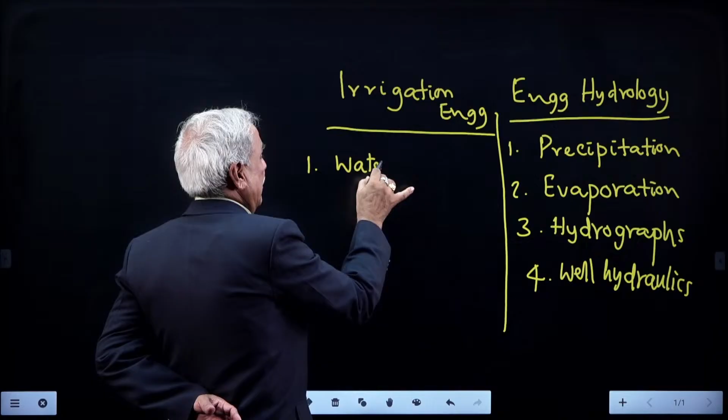First chapter is water requirement of crops. Second chapter is design of unlined canals. Third chapter is diversion headworks, which in the loose sense we call weirs and barrages, and gravity dams.

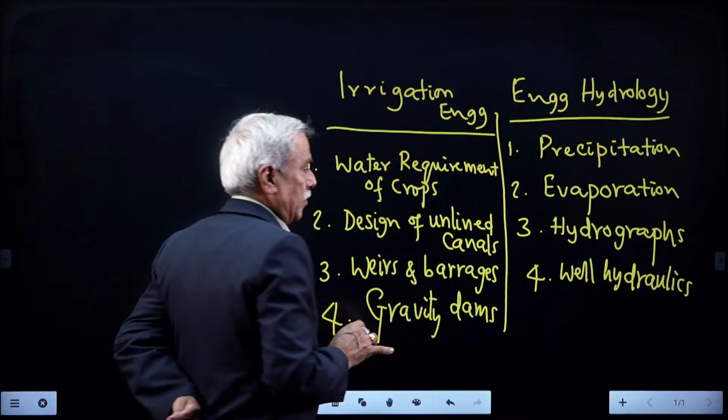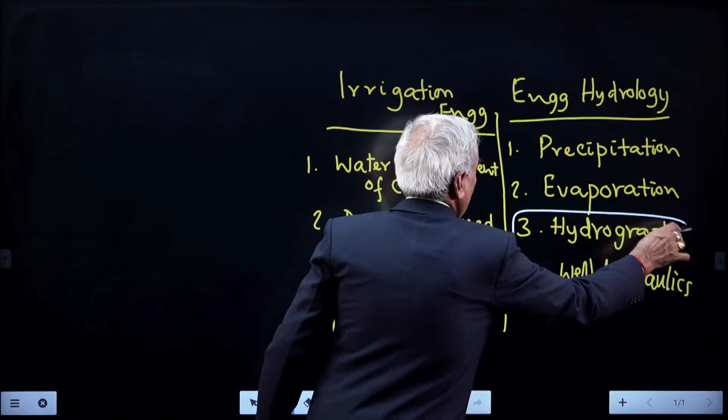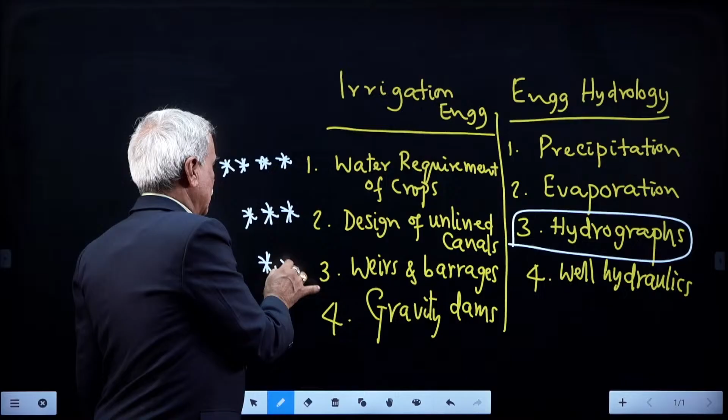Out of 4 chapters, there are 12 chapters available in irrigation engineering, including percolation tanks and miscellaneous topics. Even though the syllabus is given in a very wavery and vague format, depending upon the questions given in previous RRB examinations, the related topics you must and should prepare thoroughly.

For water requirement of crops, don't forget any of the points. For unlined canals too, with somewhat less concentration you can refer to diversion headworks and gravity dams. Don't forget to touch earthen dams also - sometimes a question is asked from earthen dams too, so you can answer very easily. Remember, those 4 chapters and these 4 chapters, total 8 chapters, will make you self-sufficient to get selected for the job of engineer in RRB.

With once again, good luck. We will see one by one, chapter by chapter, what important points and what important questions you have to see in the respective chapters.

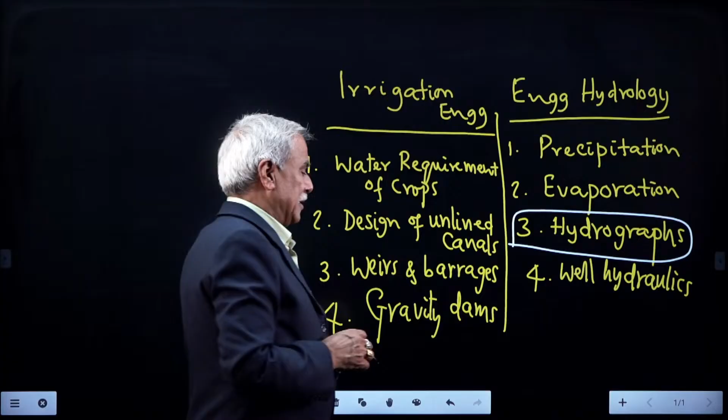First we see precipitation. What is the average rainfall in India? Average annual rainfall in India, the most commonly asked question, is 119.4 centimeters.

What is the most commonly used non-recording rain gauge in India? Most commonly, everyone knows the Symon's rain gauge is the non-recording type rain gauge, and it is the common one. Till recently, these days we are using the Indian standard non-recording rain gauge.

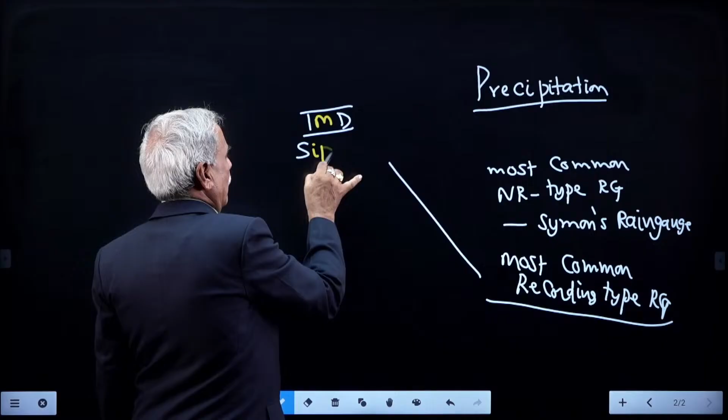Which rain gauge is used to measure both rainfall and snowfall? This is nothing but a weighing bucket rain gauge. So all the 3 recording types - weighing bucket type rain gauge - all have individual specialities. Indian Meteorological Department has recommended siphon type rain gauge; in remote areas, the tipping bucket is most accurate and the weighing bucket rain gauge is most rugged.

Which rain gauge will work based on Hooke's law? Your answer: weighing bucket rain gauge.

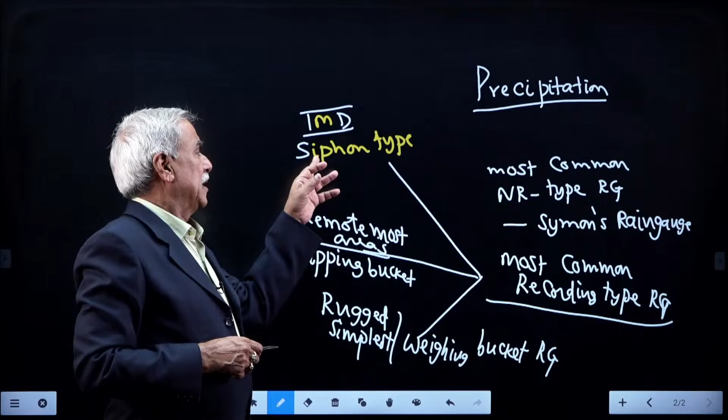Which of the following rain gauges will not give mass inflow curve as the output? Answer: tipping bucket. Tipping bucket will give hyetograph as the output. Remember this: weighing bucket and siphon will give mass inflow curve as the output.

What is mass inflow curve? This question may be asked. Mass inflow curve is a plot between accumulated rainfall versus time. Cumulative rainfall versus time is the answer.

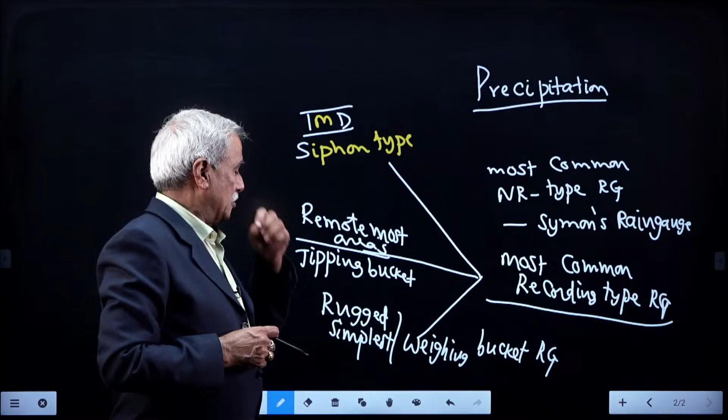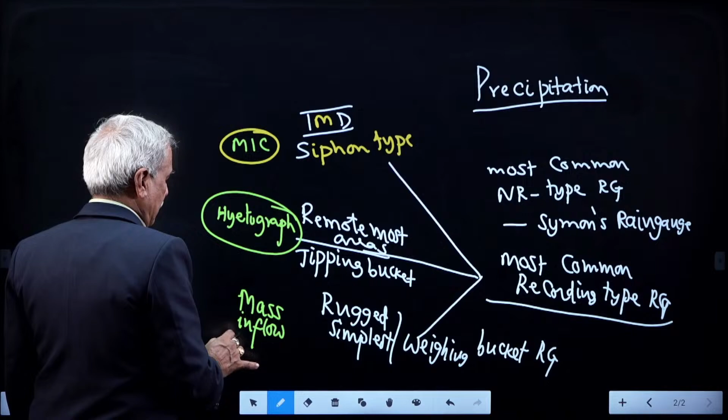So the output graphs are equally important. For siphon and weighing bucket, mass inflow curve will be the output. For tipping bucket, hyetograph will be the output graph. Mass inflow curve is popularly abbreviated as MIC. So which of the following rain gauges will not give mass inflow curve as the output? Your answer is tipping bucket.

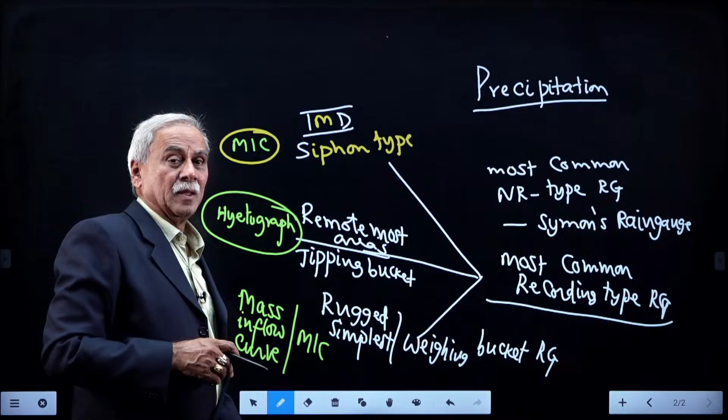So, for recording rain gauges, a question may be asked like this: if the optimum number of rain gauges is capital N, minimum 10% of N must be of recording type. According to the Indian Standard Code observations, minimum 10% of capital N must be of recording type. At the maximum, 90% of N can be non-recording type rain gauges, because non-recording gauges are cheap and easily accessible, and everyone will prefer them - it is sufficient also.

But to get higher accuracy in measuring the average depth of rainfall, it is better, according to IS code provision, that in any catchment area, minimum 10% of the total optimum number of rain gauges must be of recording type, and siphon type is commonly preferred. IMD recommended recording type rain gauge is siphon type rain gauge. Siphon type is also called float type.

Float - a wooden scale is kept on the free surface of the collecting chamber. As the volume of water collected accumulates and the float moves upward, the ordinate on the graph keeps increasing, showing that mass inflow curve is the output graph.

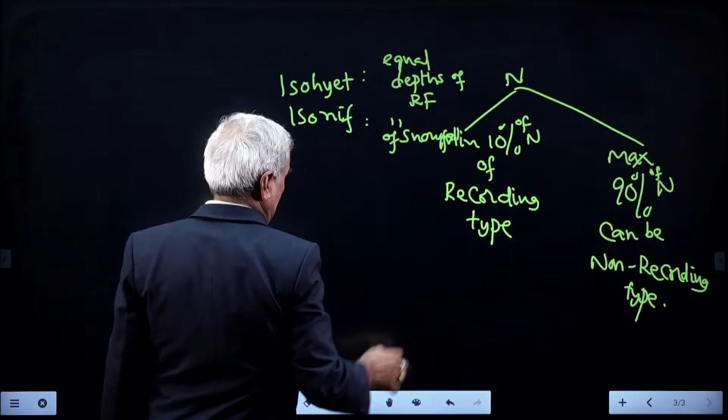Please remember this point too, it is very important. If a question is given as isohyet and isonif - isohyet is the line joining equal depths of rainfall. isonif is the line or curve obtained by joining equal depths of snowfall.

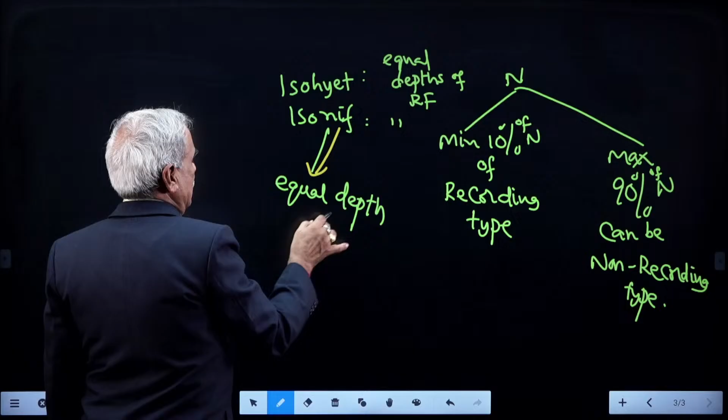The difference between isohyet and isonif may be asked. You may also be asked, what is isopleth? Isopleth is the line or curve obtained by joining the points of equal potential evapotranspiration values.

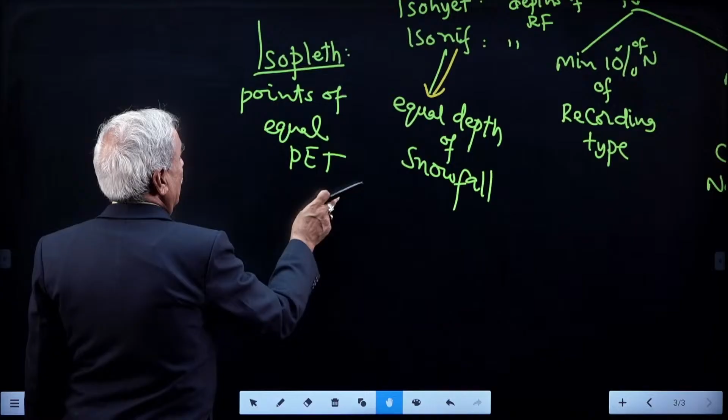It may also be asked as isopluvial. What is isopluvial line? Pluvial is a technical name, you must remember the spelling too. What do you mean by isopluvial lines? Isopluvial lines are the lines joining the points of equal depths of rainfall in a given time interval with the same return period.

Isopluvial lines are obtained by joining the points of equal depths of rainfall in a given time interval, all with the same return period. Such questions may generally be asked.

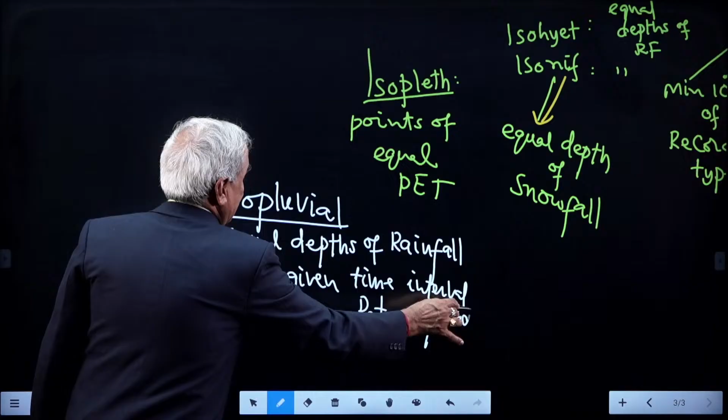Then, to calculate the average depth of rainfall, what is the most accurate method? Everyone knows the isohyetal method, commonly asked. Which method of calculating average depth of rainfall assumes an infinite number of rain gauge stations existing on the catchment? Answer: isohyetal method. Isohyets can be drawn when you know the depths of rainfall at each and every point of the catchment, which is possible when you have so many rain gauge stations in the catchment. That's why the isohyetal method is the most important one.

Which method gives the most accurate value? The reason for its accuracy is that it assumes an infinite number of rain gauge stations are existing on the catchment.

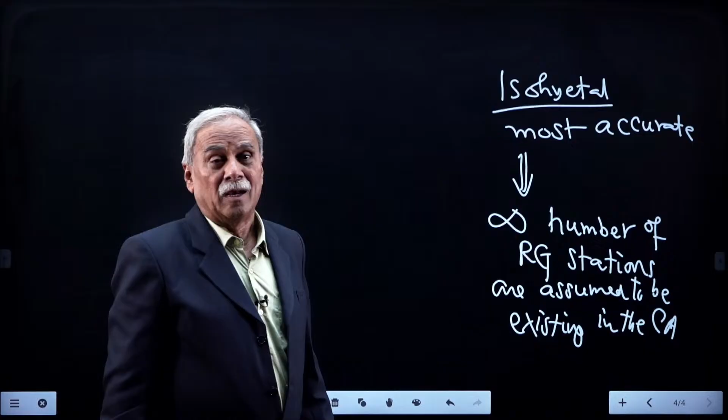Among the three methods, arithmetic mean method, Thiessen polygon method, and isohyetal method, which method has the drawback that all rain gauge stations should be within the catchment area only, not outside the boundary? Which method has the least accuracy? Answer: arithmetic mean method.

What is the essential condition for the Thiessen polygon method to be adopted? In the Thiessen polygon method, the rain gauge stations can be outside or inside, but we want to give weightage to each and every rain gauge, that's why it's called the weighted area method. What is the alternate name for Thiessen polygon method? Answer: weighted area method.

Thiessen polygon method, alternate name is weighted area method.

You are able to get such questions very easily from precipitation. A question may be asked on the DAD curve, depth-area-duration curve. The question asked will be of this type: for the given duration, if the catchment area increases, the peak depth of rainfall, P max, is going to get decreased.

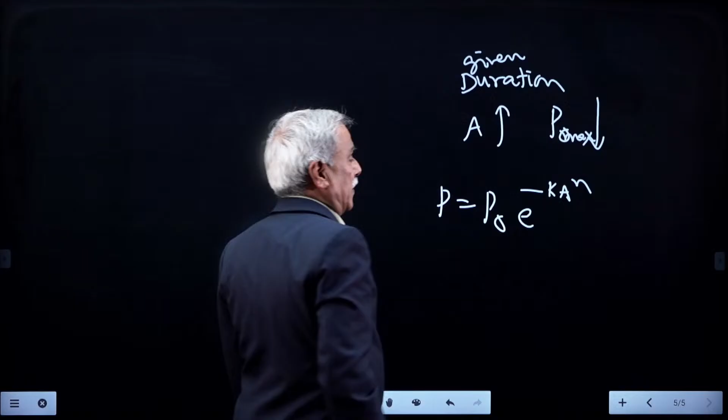For the given 1 day rainfall, 200 square kilometer catchment area will have 30 centimeter average depth of rainfall. For 2000 square kilometers catchment area, what will be the average depth of rainfall or peak rainfall depth? As area increases, peak depth of rainfall gets decreased. Answer: less than that, we cannot calculate exactly. We cannot apply the equation or get a mathematical calculation using P equals P0 into e to the power of minus K A power n.

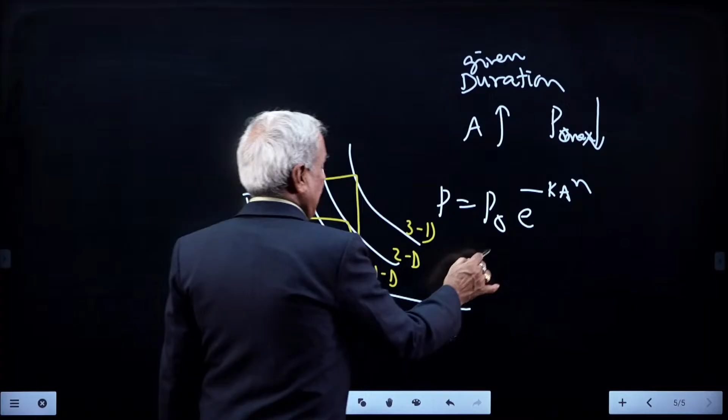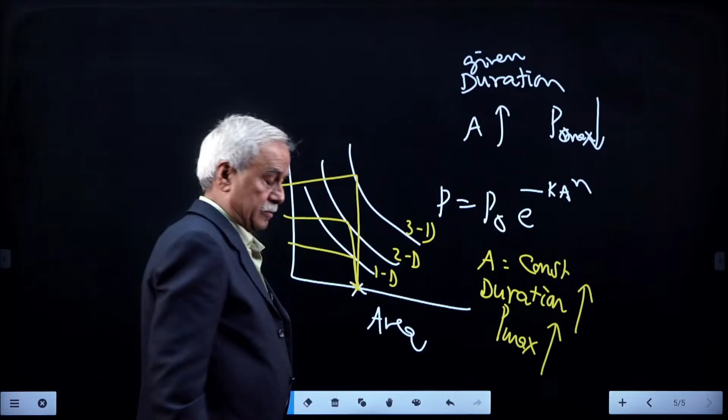We cannot get a numerical application of this formula in the exam. It will just ask: with increase in catchment area for a given duration of rainfall, what will happen to the maximum depth of precipitation? Answer: decreases. And for the given catchment area, here is area, here is depth of precipitation, here is duration. For the given area, as duration increases, say 1 day rainfall, 2 day rainfall, 3 day rainfall, if area remains constant, as duration increases, the maximum depth of precipitation also will increase.

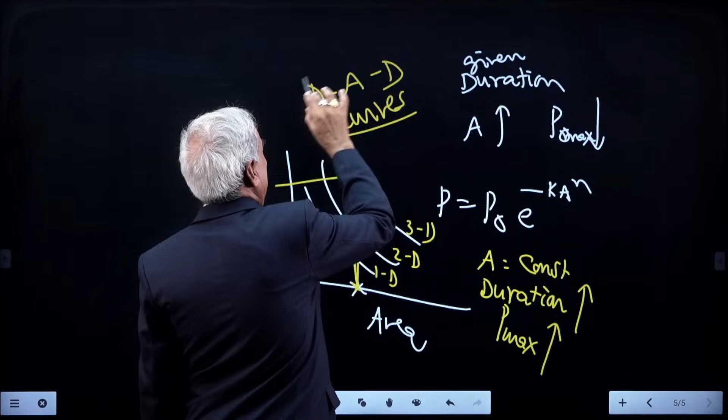Such DAD curves' importance is important, sir. What is the use of the DAD curves? This question may be asked. These are the likely questions asked in examination. If a numerical problem is given, they will most commonly give it in the isohyetal method.

If there are three curves, this is isohyet 60, this is isohyet 70, this is isohyet 80. The area between them is A1, the area between the next is A2. A1 area is bounded by 60 and 70, so average depth of precipitation will be 60 plus 70 by 2, giving 65. For 70 and 80, this will give 75. So A1 into 65 plus A2 into 75, divided by A1 plus A2, will give the total average depth of rainfall.

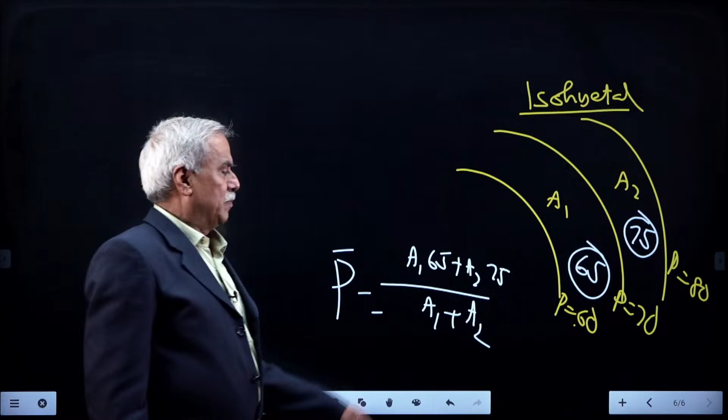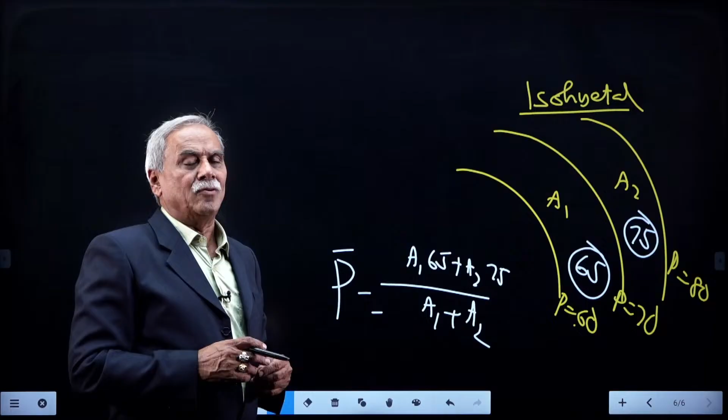Application of the isohyetal method will generally be asked in numerical calculations and it's also an easy one: P1 plus P2 by 2, multiplied with A1, plus P2 plus P3 by 2 multiplied with A2, whole divided by A1 plus A2, you will get the value of P bar very easily from this.

You may be asked the definition of return period. It is the minimum time taken for a particular rainfall equal to or greater than P to occur once again in the catchment area. Define return period - there is a possibility he will ask for the entire definition, asking what is called as recurrence period or return period.

When we want to have the statistical study of rainfalls at a given rain gauge station, this frequency distribution will be studied at a particular rain gauge station - that is called point rainfall. You may be asked: what is meant by point rainfall? The rainfall recorded or measured at a particular single rain gauge station is called point rainfall. Frequency studies of rainfall will be studied with reference to a particular rain gauge station, that's why frequency distribution will be referred to as point rainfall. Point rainfall is rainfall recorded by a single rain gauge station.

Now, return period definition: the minimum time taken for a particular rainfall equal to or greater than a particular rainfall to occur again at a given catchment area, T.

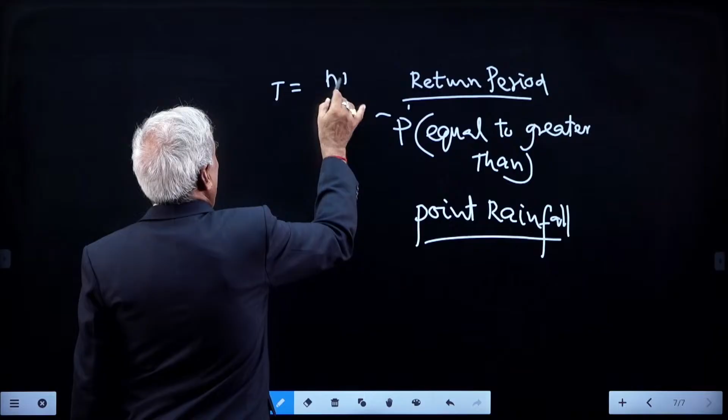If T is known, the most important formula for T is n plus 1 divided by m. Don't forget this Weibull's formula. Which method is the most commonly adopted to calculate the return period? Answer is Weibull's formula: T is equal to n plus 1 divided by m.

N is the number of years of data available to you, the number of average annual rainfalls at that particular rain gauge station available, capital N. Whatever rainfall is referred to you, what is the rank of that rainfall when you write all the values in decreasing order - that gives you the Weibull's formula to calculate the return period.

Once I know the return period, probability of success of the event will be 1 by T. Probability of failure of the event is equal to 1 minus P, that is 1 minus 1 by T. Once you know this, then probability to get the required rainfall, probability not to get the required rainfall - there are 4-5 cases. That much question may not be given, but have a glance about the 5 cases.

Most common, most important one is probability of getting a particular rainfall at least once in the coming n years. In the coming n years, at least once to get the rainfall, what is the chance? Your formula is 1 minus q power n.

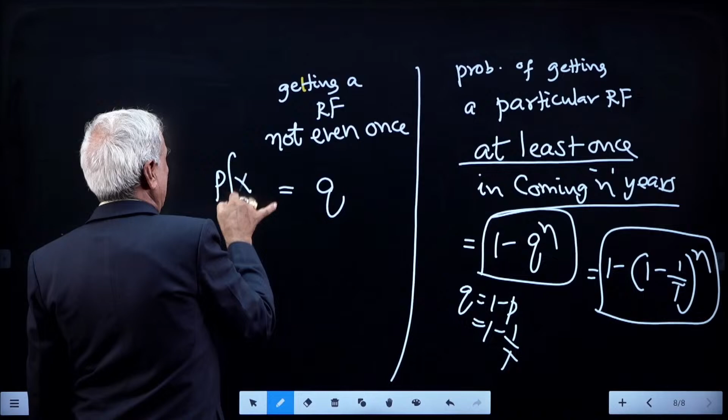1 minus q power n formula. What is the probability of getting a rainfall not even once? It's complementary, so it's the probability of x is equal to 0. Q power n is the formula we get for probability of getting a rainfall not even once. At least once is the complementary of that: 1 minus q power n, which is the probability of getting a particular rainfall at least once.

These particular formats are important in the probability distribution. When we see evaporation, a question can be asked on pan evaporimeter.

Pan evaporation, United States Weather Bureau Class A pan, coefficient of pan will be 0.7, we know the CP value: E water body divided by E pan. Rate of evaporation of the water body is equal to Cp into E pan.

We do the experiment on the pan constructed by the side of, on the bank of, the water body - if it is the river, on the bank of the river; if it is the reservoir, on the bank of the reservoir. From whatever water body you want to calculate the rate of evaporation, we are able to calculate E pan, multiply by Cp, to give E water body. The rate of evaporation from the water body we can calculate.

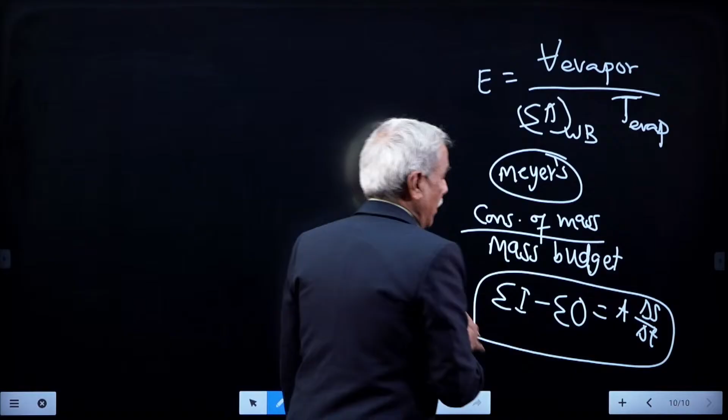By applying conservation of mass, we use the third method - the mass budget method. Sum of inflow minus sum of outflow equals A into delta S by delta T. Sum of the inflows to the water body minus sum of the outflows equals change in storage. To make it dimensionally homogeneous, by writing all the values you can get the rate of evaporation, which appears somewhere in the sigma term. You can derive that formula very easily.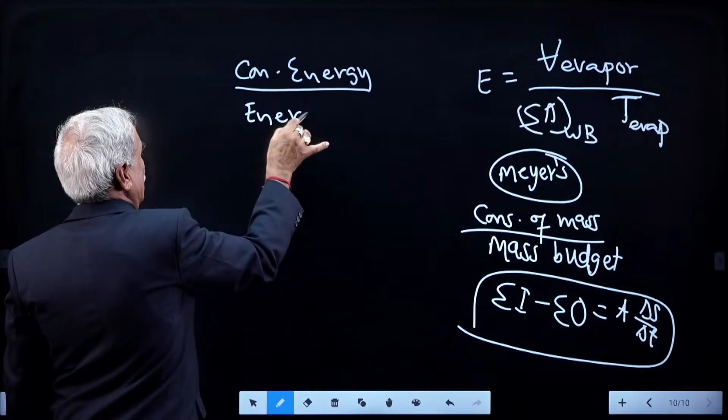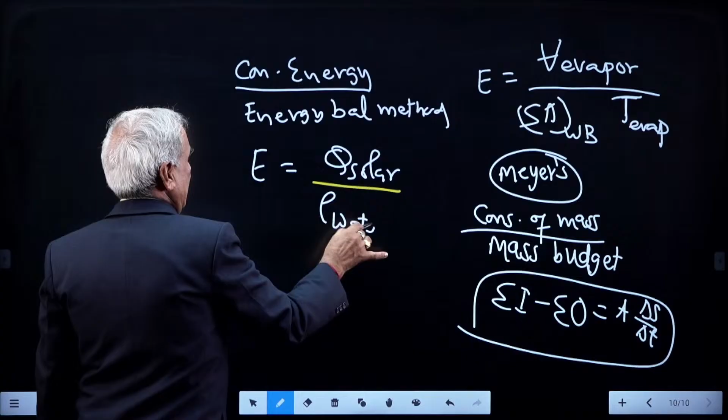The fourth method is the conservation of energy principle, also called the energy balance method. The formula for rate of evaporation equals solar heat energy divided by density of water into latent heat of vaporization. This is also a valid formula. This may be a question because these two are constants - 1000 kg per meter cube, and 540 into 4200 in SI units. If you are given the solar heat energy constant, you can calculate the rate of evaporation from that water body on that day, since you know the solar energy and can calculate the heat energy radiated. This is also an important area where a question will be asked in the RRB examination.

Then transpiration and evapotranspiration. Evapotranspiration questions are asked based on moisture content. Which of the following losses will depend upon the moisture content of the soil? Answer: moisture content will decide potential evapotranspiration and actual evapotranspiration. When the moisture content equals the permanent wilting point, there is no water available, so the AET value becomes 0. As moisture content increases and MC becomes field capacity, actual evapotranspiration will become equal to potential evapotranspiration. This is a very important point to remember.

With increase in moisture content of the soil in the catchment area, what happens to the rate of evapotranspiration? Answer: it increases from 0 to a maximum value. At what moisture content will AET be 0? Answer: permanent wilting point. At what moisture content will AET become equal to PET? Answer: field capacity. In between, MC equal to OMC will also come up. So these values you should remember regarding potential evapotranspiration.

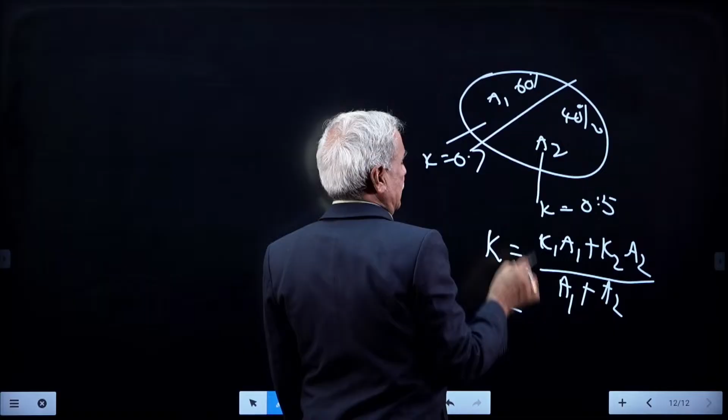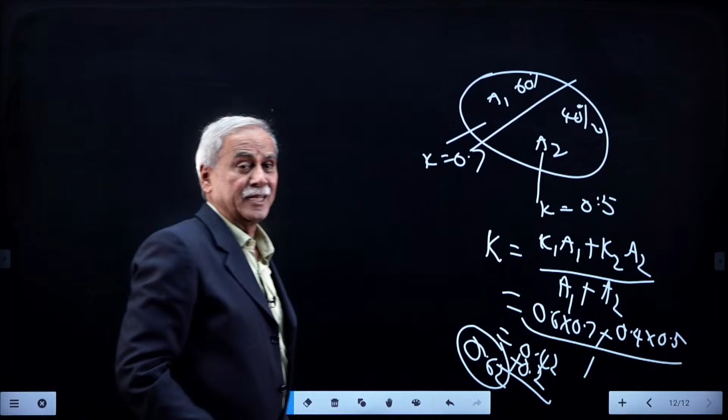K1 A1, simple formula. K1 average means weighted average. Using K1A1 plus K2A2 divided by A1 plus A2, formula we can get: 60% is 0.6 into 0.7, 40% is 0.4 into 0.5, divided by 0.6 plus 0.4. Answer is 0.42 plus 0.2, that is 0.62. Total average runoff coefficient of the entire catchment area is one important formula in the runoff chapter.

When different parts of the catchment have different runoff coefficients, K1A1 plus K2A2 plus K3A3, whole divided by A1 plus A2 plus A3, will give you the average value of runoff coefficient of the entire catchment.

From the runoff, hydrographs are important, as you know. It is the flood hydrograph you must know. Flood hydrograph will be including the base flow. Runoff discharge versus time defines the hydrograph.

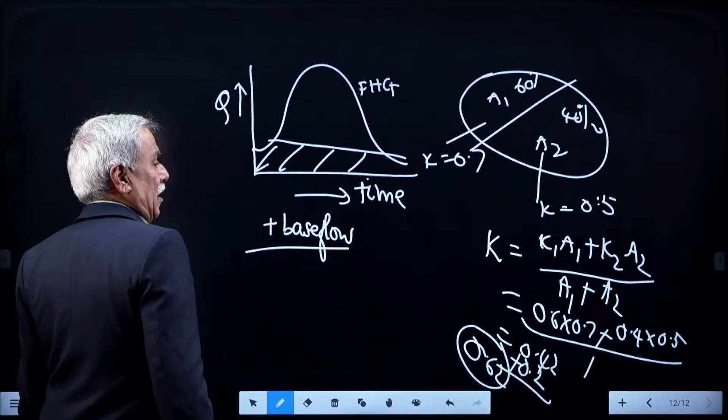If it includes base flow, the water which is not visible, flowing at deeper beds of the catchment area, unmeasurable and cannot be seen, that is called base flow. Then it is called flood hydrograph. Hydrograph is the graph drawn between discharge and time.

In the first chapter on hydrograph, we mentioned the name but did not see what a hyetograph is. Intensity of rainfall versus time. Area of the hyetograph gives the depth of precipitation.

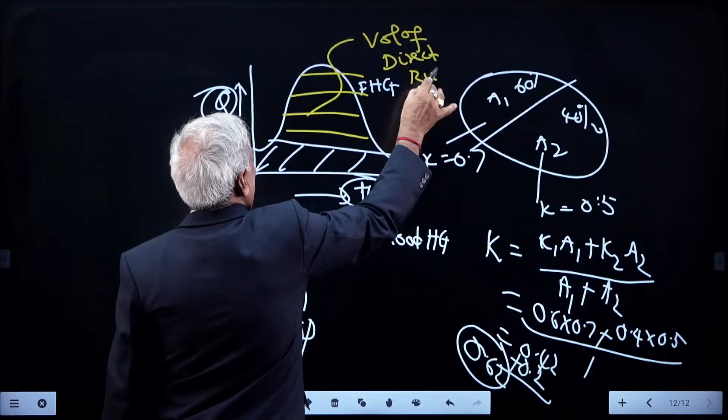Area of the hydrograph gives the volume of the runoff, specifically the volume of direct runoff. The question may be asked: what is the area of... if you remove the base flow from the flood hydrograph, you will get a direct runoff hydrograph.

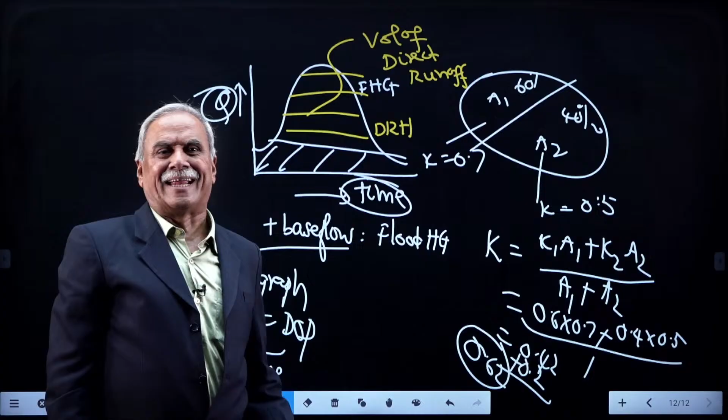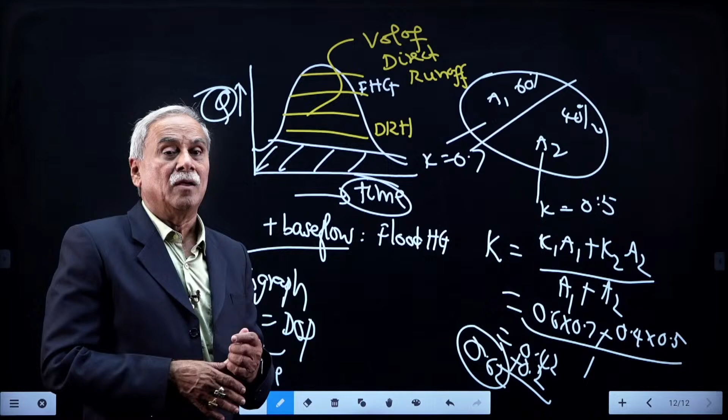Direct runoff hydrograph is given by subtracting the base flow from the flood hydrograph. Flood hydrograph minus base flow will give the direct runoff hydrograph.

What is the use of the S-curve hydrograph? When the rainfall duration is extending to infinity, you are going to get a stage of equilibrium.

A formula may be asked: QP formula is 2.778 A by D, where A is in kilometer square, D is in hours, and QP is in meter cube per second. By taking all the conversion factors into account, this format has come. Don't forget, QP is in cumecs, A is in square kilometers, and D is the duration of the rainfall, initially taken as the unit rainfall duration, D hours.

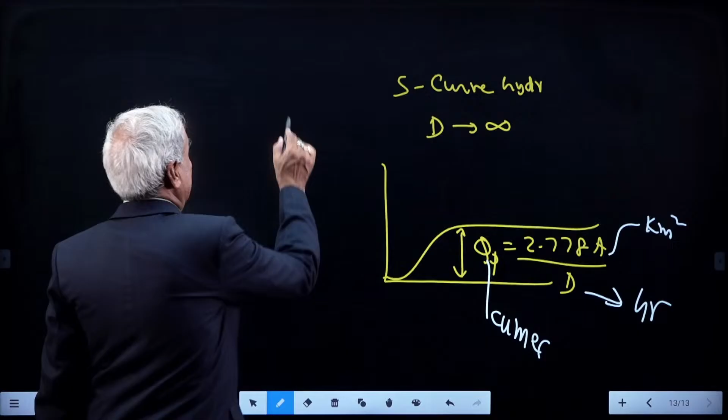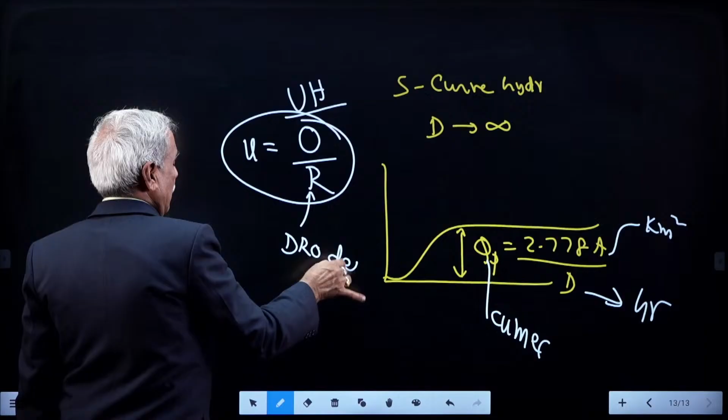Then there's the importance of unit hydrograph. To get the ordinates of unit hydrograph, divide direct runoff hydrograph by R value, where R is called direct runoff depth. How do you calculate the direct runoff depth? Area of the DRH divided by catchment area.

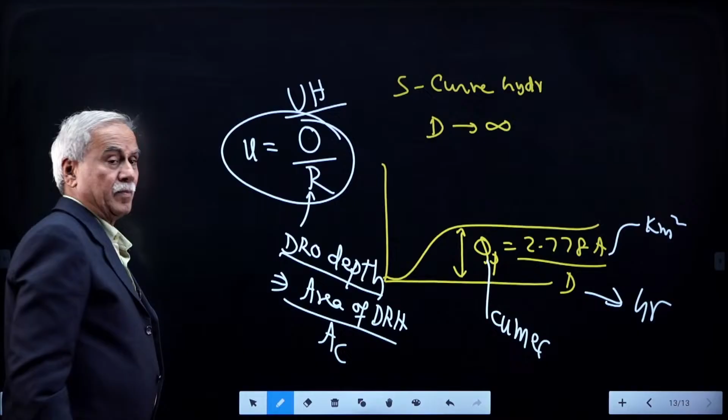This is also a question given in a previous RRB examination. Once you get the flood hydrograph minus base flow, you get the direct runoff hydrograph. Direct runoff hydrograph divided by area, that is the area of the direct runoff hydrograph divided by area of the catchment, will give the DRO depth, capital R.

Dividing each and every ordinate of the direct runoff hydrograph by R, you will get the corresponding ordinate of the unit hydrograph at that instant of time. Such questions will be asked in the examination.

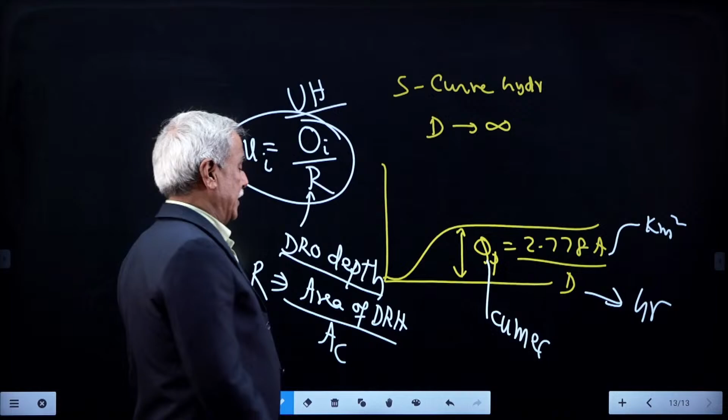What is the hydrograph, and then what happens to the base period if the duration of the rainfall increases? Such questions are also asked. Without changing I, if D1 increases to D2, B1 increases to B2.

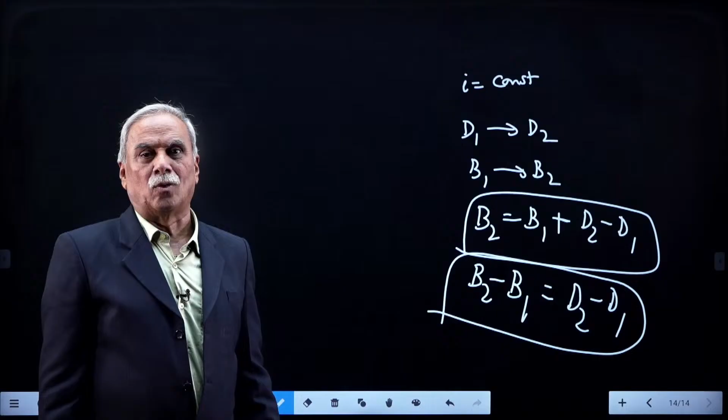So the formula is B2 equals B1 plus D2 minus D1. This is the difference of the base periods. Base period is nothing but duration of the runoff, everyone knows. Difference of the base periods of two runoffs is equal to difference of the durations of two corresponding rainfalls. A very important formula: B2 minus B1 equals D2 minus D1.

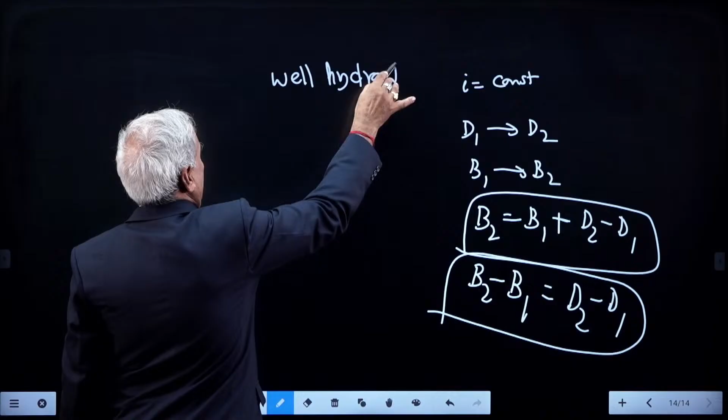Then flood routing and such chapters are not that much important. In well hydraulics, they are asking questions almost alternate times. In well hydraulics, you must know the definitions of aquifer,

Examples of these four geological configurations you must remember: high N value, high K value for aquifer; moderate N value, less K value for aquitard; K value almost 0 with moderate N value for aquiclude.

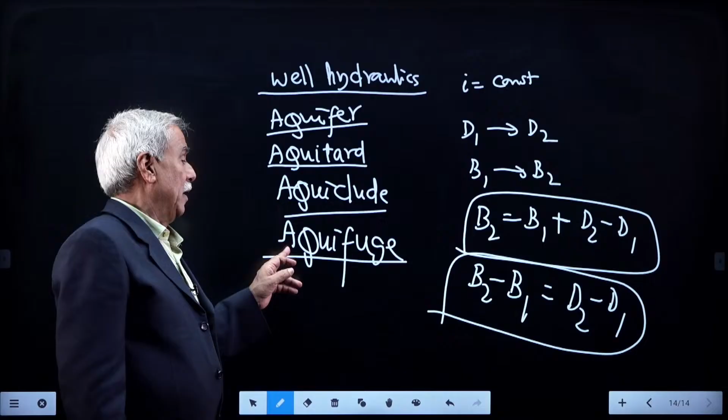Here N0, K0, rock is the example. Which of the following will be referred to as the example of rock? Answer: aquifuge, neither able to store the water nor able to transmit the water.

Able to store the water but unable to transmit the water is an aquiclude. Able to store water in small quantities and transmit water in small quantities is an aquitard. Able to store large amounts of water and also deliver large amounts is an aquifer. Sand deposits are the best example of an aquifer.

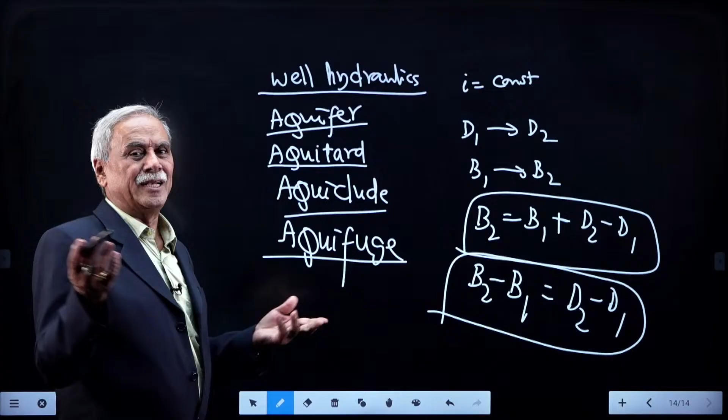You must know the difference between confined aquifer and unconfined aquifer. Specific yield and specific retention, both add up to equal porosity - this is a very important relation. Porosity of an aquifer is equal to the sum of two parameters: specific yield and specific retention. These two points are very important in groundwater hydrology.

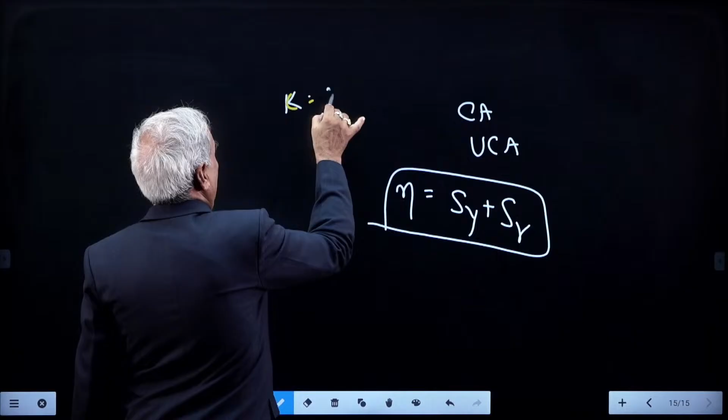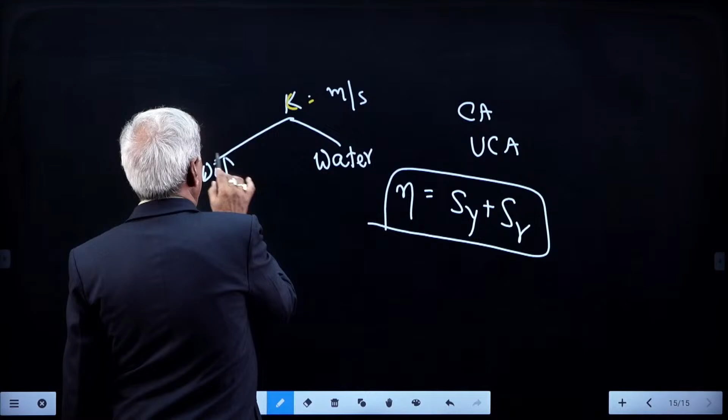What is the formula for permeability? It is similar to that of velocity. Permeability depends on two factors: soil properties and water properties. If it depends only on soil properties, then it is called intrinsic permeability.

This question may also be asked: which permeability depends exclusively on the soil properties of the catchment? Your answer will be intrinsic permeability - that is the right answer. For the remaining chapters like flood routing, if you have time you can read them.

These are the generally asked questions in the hydrology subject. Let us see some important questions on irrigation also, because the time given is 1 hour, and already almost 40 minutes is over. Let us have a brief revision of the water requirement of crops.

In the water requirement of crops, the most important question is: what is water application efficiency? It is Q transferred to the plant divided by Q transferred to the field. Water conveyance efficiency is Q transferred to the field divided by Q supplied to the canal system. If you multiply these two, you get overall efficiency.

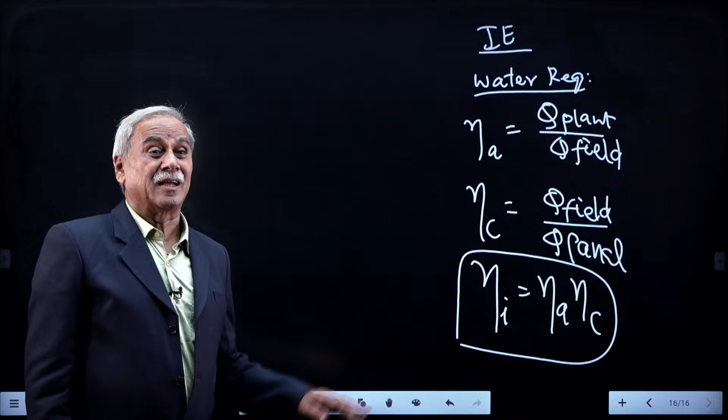Overall efficiency is the product of application efficiency and conveyance efficiency. Application efficiency indicates the losses of water in the field by the time it reaches the plant, and conveyance efficiency indicates the losses in the conveyance system - that is, main canal, branch canal, major distributary, minor distributary, and field channel.

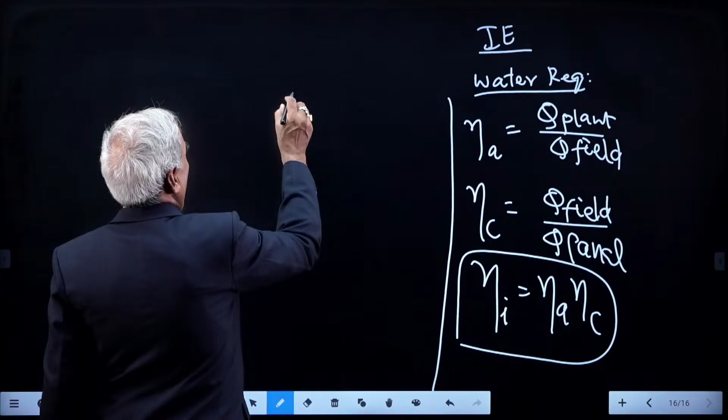These are important formulas - the relation between duty, delta, and base period. In the SI system, delta is equal to 8.64 B by D. Delta is the depth of water required to get the plant completely matured, in meters.

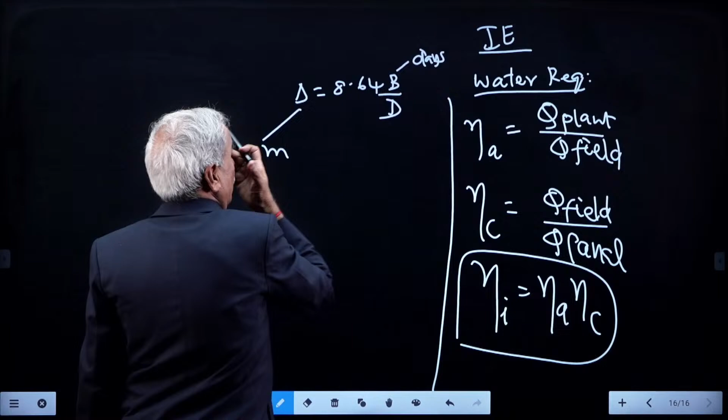B is the total duration of the crop - within what time the water supply will be totally over, whatever water is required to be delivered to the crop to get it to maturity. What's the time available? The time interval between the first watering and the last watering is called the base period. D is the duty of water.

Duty of water is given by: area actually irrigated by discharge. This definition is very important. In the SI system, delta equals 864 B by D, and this delta will be in centimeters. These questions may be asked on this topic also.

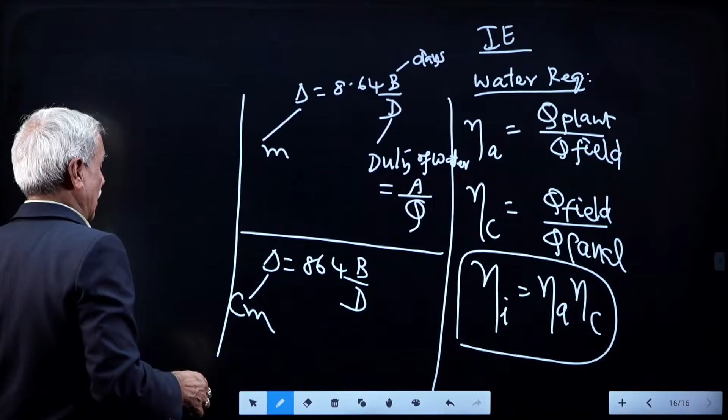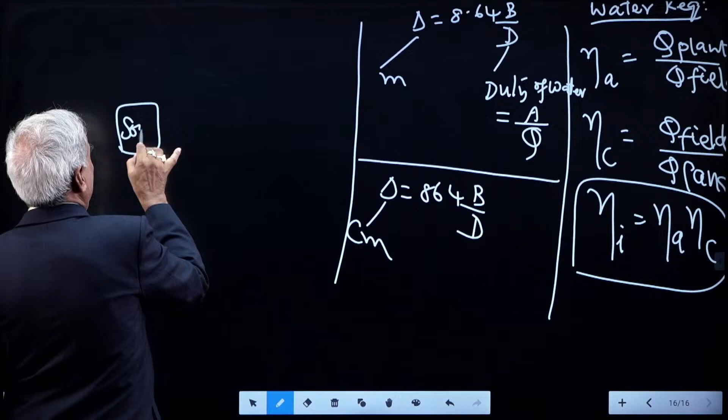Efficiencies and delta values - then, as we move from the source to the field...

Q will decrease and duty will increase. This is a very, very important point. As the water progresses, which parameter of water requirement of crops will increase as water travels from source to destination? Discharge will decrease because of consecutive losses.

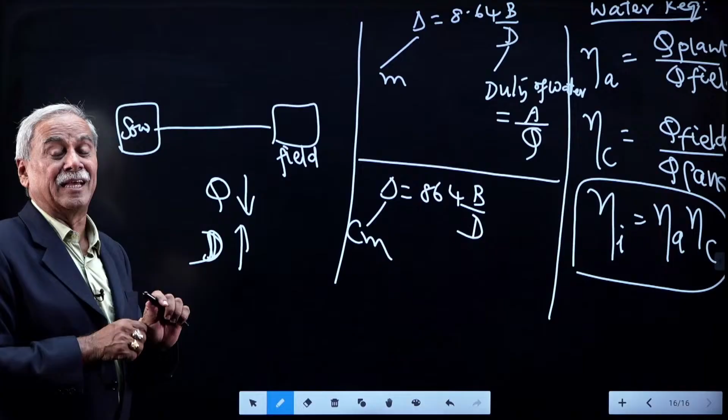Depth of water available becomes less, volume of water available becomes less, time period goes on decreasing, and the only one increasing is duty of water, because it's area by discharge. As discharge goes on decreasing while area remains constant, a constant value divided by a decreasing value automatically gives an increasing value.

Which parameter will increase in value as water travels from source to destination? Answer: duty. Answer: duty. Duty of water is very, very important.

Examples of Rabi crops you must know, and examples of Kharif crops. For Rabi, remember OMR: October to March is the Rabi season - 6 months theoretically, but actually 4 months. Kharif season crop example: rice.

Like that you can remember. For Kharif season, remember ASK: April to September is Kharif - April, May, June, July, August, September, 6 months theoretically, but practically 4 months. So Kharif season gives rice and Rabi season gives wheat - these are the most common examples.

These examples are given just for the sake of it. The main purpose: if we have land of sufficient strength to get irrigated, and if you are able to get the water delivered to the plant - whatever delta value is needed for the crop - if you are able to supply more than sufficient water, these examples are just given for the sake of naming.

Summer season crops are called Zaid crops. It was once asked in an IES examination, what is the duration of the Zaid crops? Answer: 2 months. Peak summer 2 months, generally April 15th to June 15th.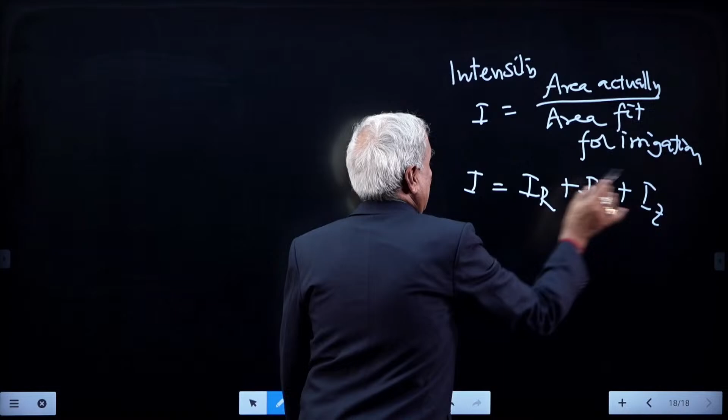I can be calculated for Rabi season, I can be calculated for Kharif season. Total I is equal to I Rabi plus I Kharif, plus if there is a third season crop, then I Zaid. This is one of the important formulas we get in the water requirement of crops.

Then in methods of irrigation, sometimes it is asked: which of the following is the most important essentiality to adopt sprinkler irrigation when the area is having water scarcity. When the area has water scarcity, there is no other option, you have to go for sprinkler irrigation with the limited water. Maximum area should be made wet. Necessary water can be delivered by sprinkling water on the plant's leaves so that the efficiency of irrigation will get increased.

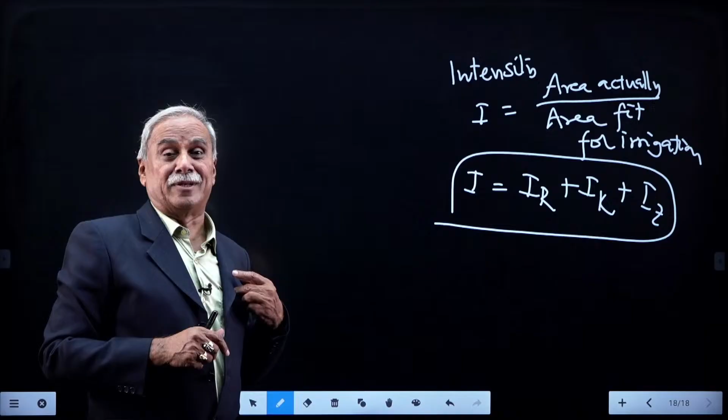What is meant by drip irrigation? What is the difference between drip irrigation and trickle irrigation? What is meant by furrow? One of the SSC JE examination questions, may be asked in RRB also: what is meant by furrow? Furrow is a small open channel constructed within the field in order to deliver the water laterally below the ground level - furrow irrigation. Such questions are important.

Questions will be asked on the moisture contents of the soil, which is very important: saturation capacity, field capacity, optimum moisture content, temporary wilting point, permanent wilting point, ultimate wilting point. This area is also very important for RRB.

What is gravitational water? The water which is undesirable for the plant's growth, that is called gravitational water. It's the water that should be drained out at any cost - the water available between saturation capacity and field capacity. What is the water content useful for the plant's growth? Field capacity to permanent wilting point, that is called capillary water. It is the water meant for plant's growth.

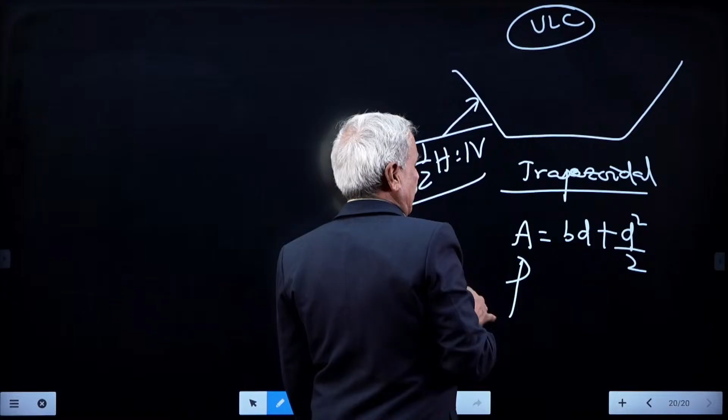What is the formula for wetted perimeter? B plus D root 5, that is B plus 2.236 times D. These two formulas are also standard formulas you must remember regarding unlined canals.

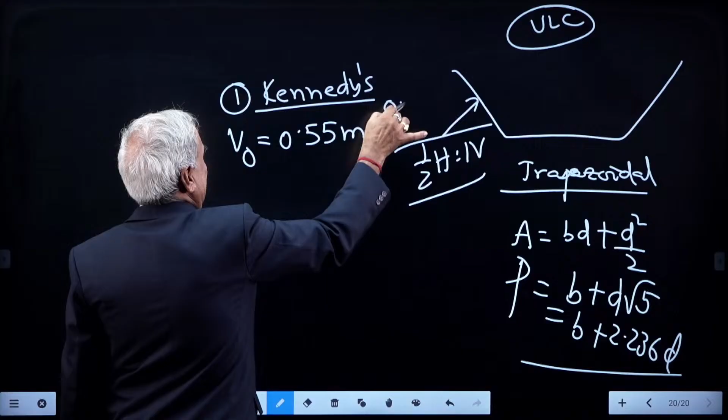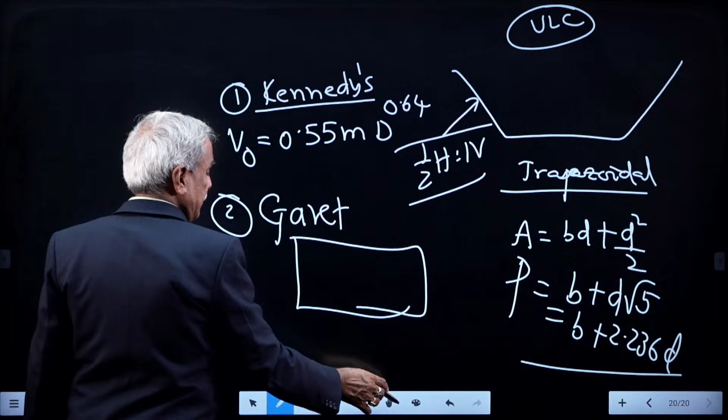There are three theories available. Theory 1 is Kennedy's theory. Kennedy's critical velocity is given by 0.55 m d power 0.64. Second one is Garrett's theory, which is a graphical theory. And the third one is Lacey's theory.

As on today, design of unlined canals is based on Lacey's theory - Lacey's non-silting, non-scouring theory. Non-silting, non-scouring doesn't mean no silt, no scour. That is called state of equilibrium, called regime theory.

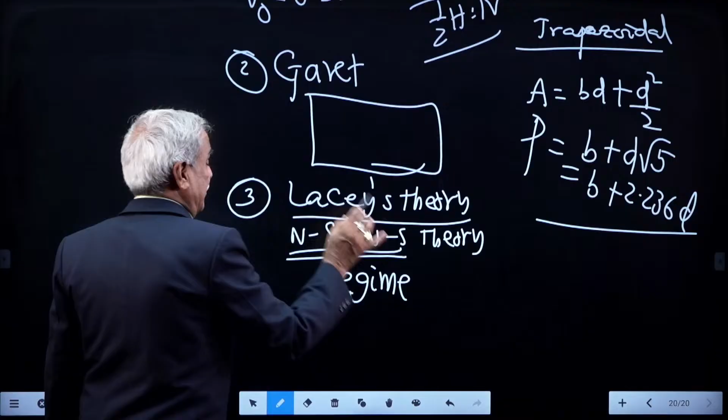What do you mean by regime condition? It's the condition of equilibrium. Whatever water is coming from upstream, whatever silt load is coming along with the water, the same silt load should be transported to the downstream side. It means status of regime, status of equilibrium, status of non-silting, non-scouring condition. This is what we have to remember.

Regarding Lacey's regime condition, you must know what is initial regime - when B and D are fixed, longitudinal bed slope is not yet finalized. That intermediate stage of design is called initial regime.

When all three dimensions are fixed, what are the three output parameters of an unlined canal in alluvial soil? We should remember bed width, depth and bed slope. If all three are fixed up, the canal design is said to be in the state of final regime.

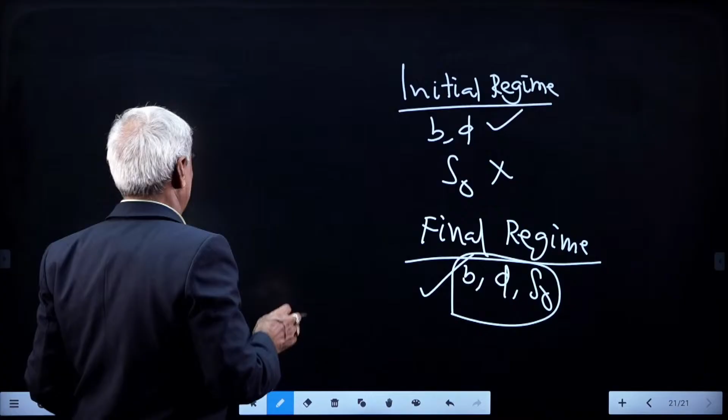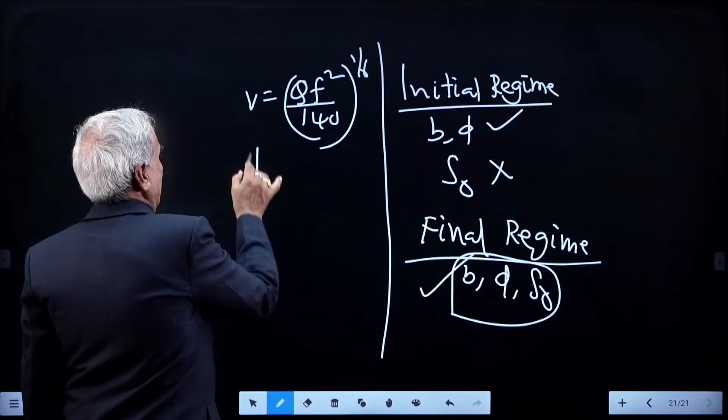Lacey's equations are important. V is equal to QF square by 140 whole power 1 by 6. This was asked in a previous RRB examination. The formula for wetted perimeter is equal to 4.75 root Q.

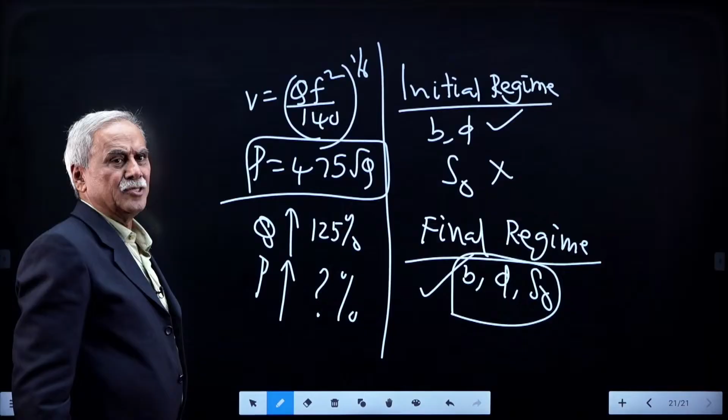This was asked in one exam, my dear friends: when the discharge is increased by 125%, wetted perimeter increases by what percent? Simple question: P1 by P2 is equal to square root of Q1 by Q2. P1 is 100, P2 is unknown. Q1 is 100, Q increased to 125, so 100 plus 125 is 225. Root 100 is 10, root 225 is 15. So 100 by P2 is equal to 10 by 15. This means P2 becomes 150. So 100 became 150. Therefore, wetted perimeter increased by what percentage? 50% is the answer. Questions on Lacey's theory are important for us.

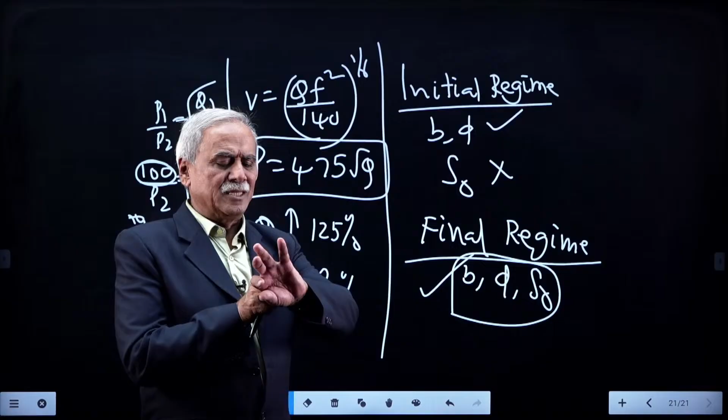Regarding diversion headworks, questions will be asked. What is the difference between weir and barrage? What is meant by piping failure?

What are the three theories available regarding the design of diversion headworks? One is Bligh's theory, second one is Lane's theory, third one is Khosla's theory. What is the most reliable one? Khosla's theory - most rational, scientific.

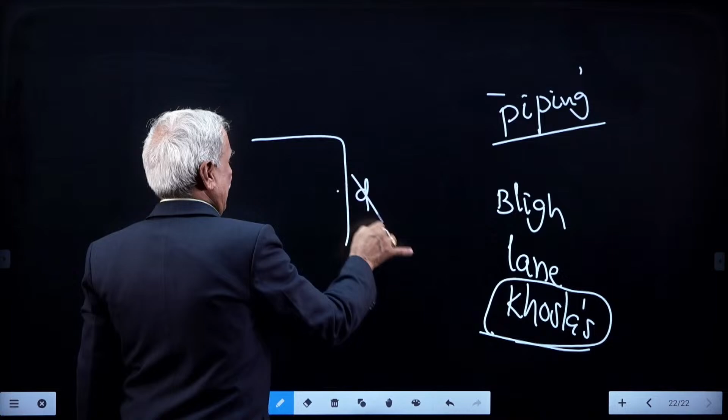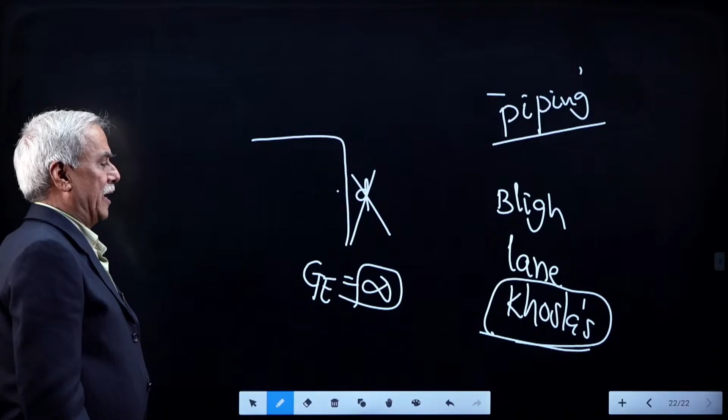Which theory is based on flow net analysis? Your answer is Khosla's theory. If the downstream pile is not provided, what will happen to the exit gradient? The answer becomes infinity - exit gradient becomes infinity means practically such a weir will not exist in reality. That's why the most important component in a diversion headwork is the downstream pile, to keep the weir protected from piping failure.

Then regarding gravity dams, go through the different forces - water force, seismic force, silt pressure force, wave pressure force. Then the four possible failures are also important: sliding failure, overturning failure, compression failure, and tension failure. These four failures are important. What are the factors of safety - you must remember these too.

These are some of the questions. Actually, because of lack of time we are not able to cover that much. Still, I have tried my level best to give the most important areas and the most important questions in the subjects of hydrology and irrigation. Once again, I wish you all the best regarding the RRB examination. Good luck, my dear friends.